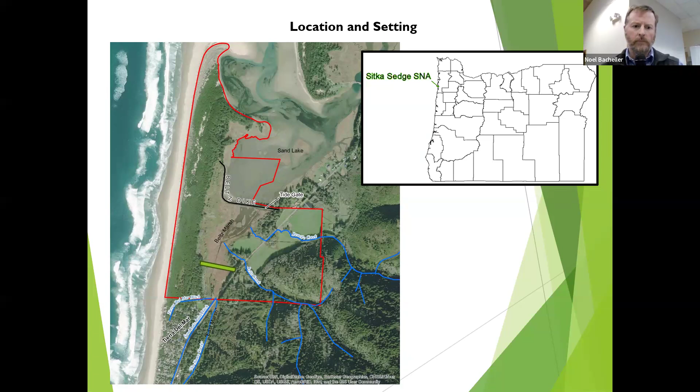This is the existing tide gate in the 1930s vintage dike. The opening of this concrete box culvert is about 4 foot by 4 foot, and it has a vertical hinged tide gate. This tide gate is missing all of its boards, so water rushes through here like crazy. The amount of water that flushes through during a high tide or a receding stormwater event is very fast because of how small this hole is in the dike.

It's like a fire hose. It's causing all kinds of eddies, bubbles, and foam. What you can see in this picture at the bottom is that these eddies, because of the excessive speed of the water, have eaten away at the inside of the dike. The dike used to go all the way out to these wing walls, and it's been eaten away mostly in the last 20 years since the boards on the tide gate flap started to fail.

It is not legal to replace the tide gate flap or the tide gate as is, because fish passage requirements have changed over the years. This is a 1930s or 1950s vintage design. The current standard calls for a much larger opening that allows more water to move more slowly, allowing better fish passage and connectivity and equilibration of water between the sides of the dike. The water blasting through here is really fast, which is considered a fish passage barrier to coho and other fish that can't swim against that high velocity.

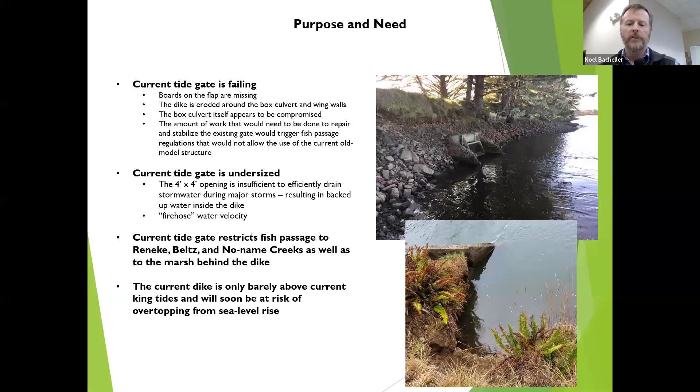So what has been done over the years? A lot of work has been done in the last 11 years on this property in general, and specifically looking at the options for dealing with the failing dike. The property was acquired in 2014, and shortly thereafter a lot of planning started, including assessments of habitat, recreation needs, scenic resources, cultural resources, everything under the sun. We found out early on there was a strong need for hydrological analysis. So in 2016 through 2019, we had two separate highly detailed hydrological studies that characterized how water flows inside and outside of the dike, what the effects would be under different alternatives, and how to weigh those alternatives against each other.

In 2020, we made a decision to look at the setback dike as the preferred alternative. And then 2020 kind of pulled the rug out from under us. We had no funding for a while, and we quickly forged a great relationship with Tillamook Estuaries Partnership to look for other ways of funding the project and continue moving it forward. Tillamook Estuaries Partnership was able to receive grant funding that allowed them to pick up the pieces and start moving forward with the planning. In 2022, we jump-started the whole effort and started moving into design in more detail and with more urgency.

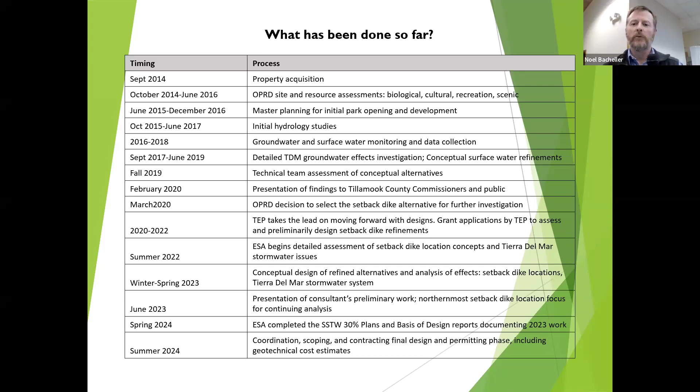Over the last 11 years, there have been at least 24 meetings open to the public and advertised. We've also had news releases and a website that's actively maintained to show the products of all the assessments being done, along with recordings of meetings like this one for people who aren't able to attend in person. We also have an email list sign-up on our webpage for anyone who would like to be notified of upcoming meetings. I encourage anyone here to join that list or look at our website and submit their email. We've also had meetings with adjacent landowners, and we have ongoing collaboration with the Tierra del Mar Community Association and other interested landowners.

Over the years, we have assessed a number of general alternatives, each with sub-flavors. On the upper left, we have the no action or existing condition alternative, which is really the do-nothing approach—what would happen if we did nothing? On the other side of the spectrum, in the upper right, we have dike breach. What was the hydrology like before there was a dike at all, and what would it be like if the dike were breached?

That's another bookend. The two action alternatives that we've really most actively pursued over the last 10 years have been replacing the existing tide gate with a modern muted tidal regulator, a side-hinge type of tide gate that's allowed to stay open for a certain amount of time but has a closure setting, sort of like the toilet float in your toilet that turns the water off when it reaches a certain level.

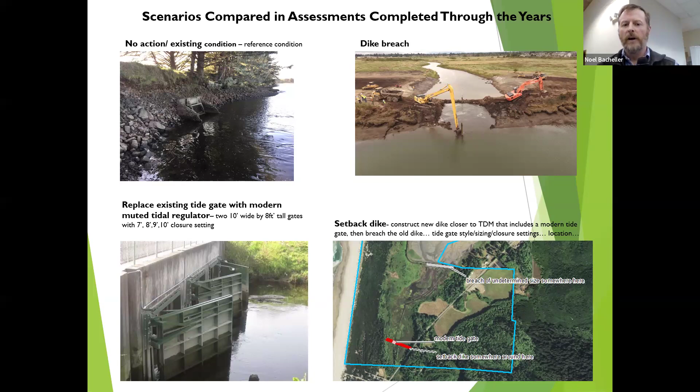This figure doesn't show much beyond the array of different effects expected under different alternatives. This slide is just an example—there are many similar figures representing different features—but this one shows the frequency of surface water presence in the marsh under each alternative.

In the upper left is the existing condition, then the modern tide gate with a 7-foot closure setting, or toilet float closure setting, then the 8-foot, 9-foot, and 10-foot settings. We also have a breach, or pre-dike, hydrology assessment of frequency, and then the setback dike, with the setback represented by this black bar.

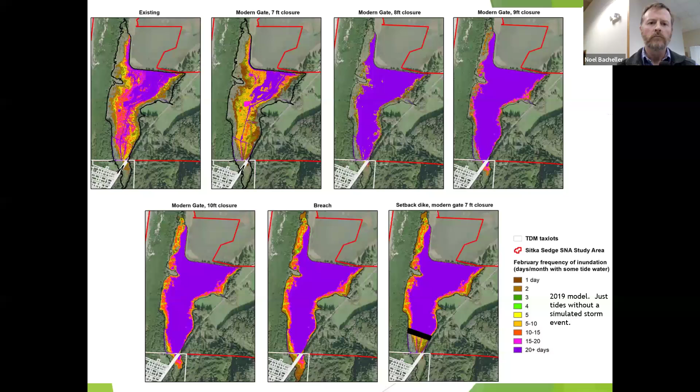This is a video that shows that in a graphical, interactive way. I'm going to pause this for a second so I can explain some of the characteristics before it moves too far, if I can.

The ads are in the way. Well, I'll just talk fast.

In the upper left here we have the existing condition—this is what's out there right now. The next one over is the modern tide gate with an 8-foot closure setting. This is the breach, or pre-dike hydrology, situation. And then the setback dike is represented in the upper right, with the setback dike itself shown as this black bar.

On the bottom, the current moment in time being depicted in the videos at the top is the black bar, and these curves at the bottom are the tide height level present in each of the different situations.

The colors are a little hard to read, at least on my screen, but the green line is the existing condition, the blue line is the outside of the dike, or the breach situation, and these truncated ones, the red and maybe purple, are the modern tide gate and setback dike alternatives.

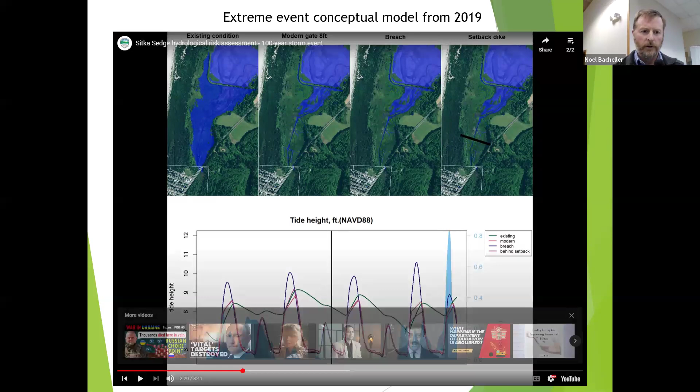Well, let me set the stage. This blue shading here is a 100-year rainfall event, a huge, huge rainfall event. It's coupled also with the highest recorded tides we've seen in our studies, which are about a 12-foot tide, which coincidentally coincides with the actual height of the low point of the dike.

So as this moves forward into the high tide situation—really wish I could move this forward.

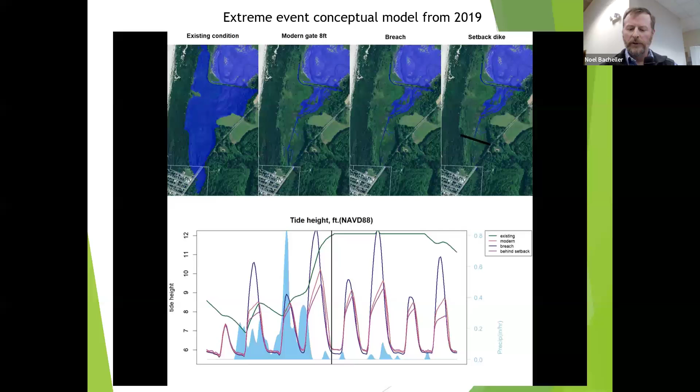So with that, OPRD's sideboards and goals for this project are fivefold. First of all, the design should result in virtually no increase in stormwater, tidewater, or elevated groundwater in private properties in Tierra del Mar. Second, the design should result in meaningful improvements to the estuary and fish habitats in the area inside the dike. Third, the design should restore fish passage to the mouths of Reneke and Beltz Creeks. Recreational access across the marsh should allow visitors to see the marsh up close, reach the beach, and enjoy the diverse coastal environments in between. And the design should route Reneke Creek to the marsh in a natural way, not in a channelized ditch. It's currently in a roadside ditch, and we'll get to that.

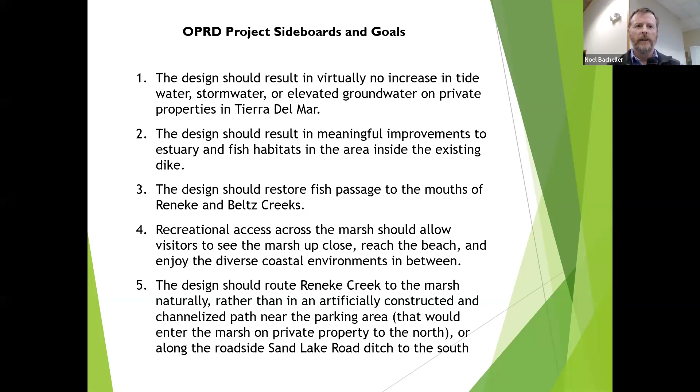So a brief summary of the pros and cons of each of these alternatives. The no action alternative, do nothing. There are no pros to this. The dike is failing. Leaving it alone is not a good idea. The second alternative, dike breach. Well, this would have a very high estuarine benefit for fish and so on, but it does not meet OPRD goals because it would result in more surface water on private property. So that one is out.

The third one, modern tide gates in the existing dike. This one has moderate level of fish benefit, has a moderate level of estuarine restoration benefit, but not as much as the setback dike alternative. The setback dike alternative offers sort of the best approximation of a win-win for both protecting the community and private property and also providing for unfettered fish passage to Beltz Creek, Reneke Creek, and for juvenile fish to move throughout the system in the area north of the setback dike.

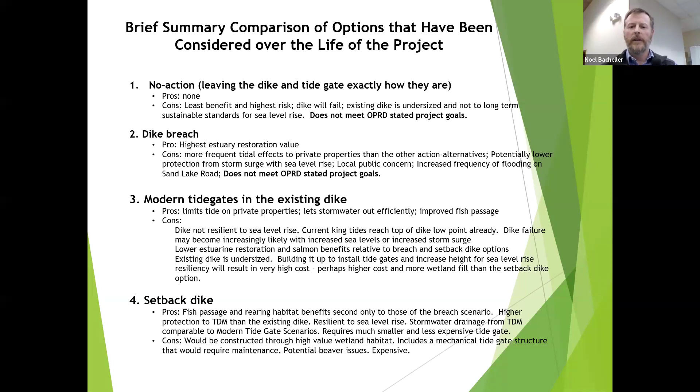In 2020, the state parks leadership, after hearing testimony from the technical team in 2019 — there was a technical team series of meetings, 4 meetings, in which representatives for various resource interests like fish, neighborhood and community infrastructure, engineering, public works were involved. That group really heard testimony and assessed wide-ranging impacts of each of the alternatives to try to provide a good picture of which one of these really makes the most sense.

Shortly thereafter, we met with the Tillamook County Commissioners and with the Oregon State Parks Commission, and then later with the Oregon State Parks executive leadership, and ultimately executive leadership of state parks selected the setback dike as the alternative to pursue moving forward. This decision was made in the spring of 2020, and shortly thereafter, we received a letter of support to aid in getting grants from the Tierra del Mar Community Association and started to try to move this forward through design.

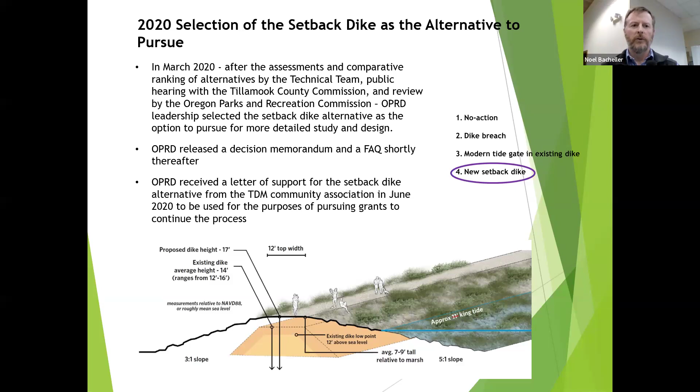And of course, COVID hit, funding fell apart, and we lost some momentum. Fortunately, Tillamook Estuaries Partnership was able to come to the rescue and really pick up this project and move it forward.

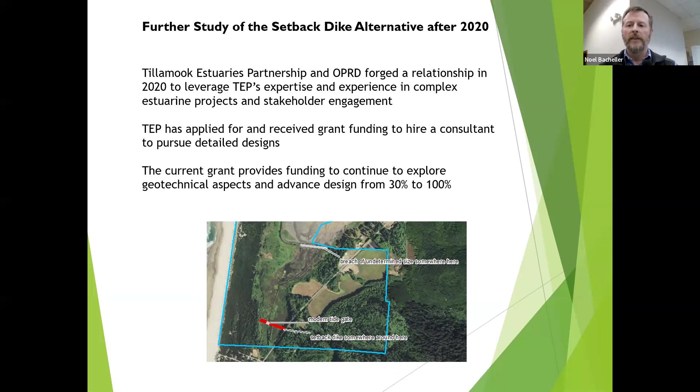So after 2020, after Tillamook Estuaries Partnership came into the program, they were able to get a grant and hire a consultant, Environmental Science Associates, and you'll hear from Hunter here soon on the different elements of design that could be incorporated into this project.

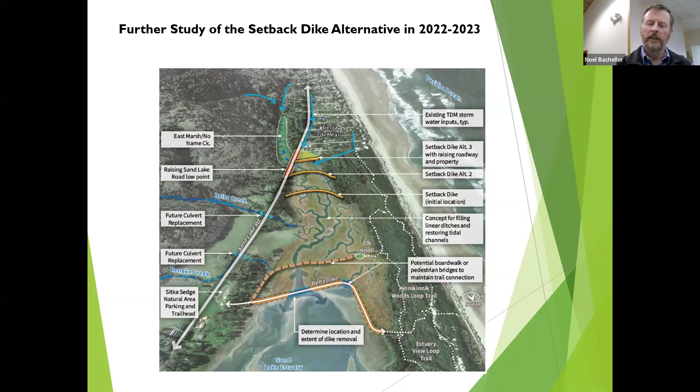And just to get to those in a real basic sense, this slide here is looking south towards Tierra del Mar from Sand Lake, and it shows an array of potential setback dike locations. It was necessary to assess a bunch of different options to figure out which one worked best. You don't know off the top of your head which one's going to work until you model it and try it. So there were an array of different options here that were assessed, ultimately ending up with a selection that you'll see in a coming slide.

Also, as part of that, Environmental Science Associates and Tillamook Estuaries Partnership did an assessment of surface water and groundwater issues in the community of Tierra del Mar. This is outside of OPRD's scope, but it may be of interest to members of the community.

So this is the process I was referring to earlier of trying to figure out exactly where the setback dike should go. I've been calling this tapping on the wall to find the stud. Is this the right spot? Not here. Is this the right spot? No. You keep going until you find one that actually meets your project goals.

In our case, the project goals we're looking for are minimizing the size of the setback dike, its footprint on the land, as well as maximizing or having a sufficient basin size behind it for stormwater storage when the dike has to be closed. There would be a muted tidal regulator in the setback dike that closes during high tide. During that time, stormwater from a big rainfall event would pool up behind the dike. If the setback dike is too close to Tierra del Mar, water levels will rise. But if it's far enough north, there's enough basin size that water levels won't rise significantly, and you'll have enough room to hold all that stormwater during the hours the muted tidal regulator is closed.

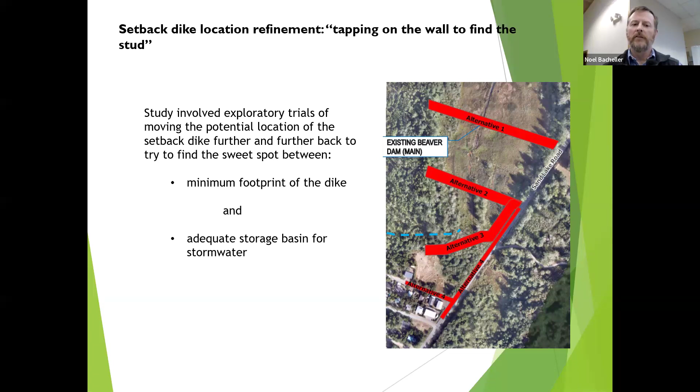So alternative one, the furthest north option, very close to the original location assessed in 2019 and 2020, is the only one that meets the goals. It has more than enough basin size to store stormwater, and it's as far south as you can go to minimize that footprint size. It also allows unfettered fish passage access to Beltz and Reneke creeks, and maximizes the amount of estuarine restoration that can happen north of the setback dike.

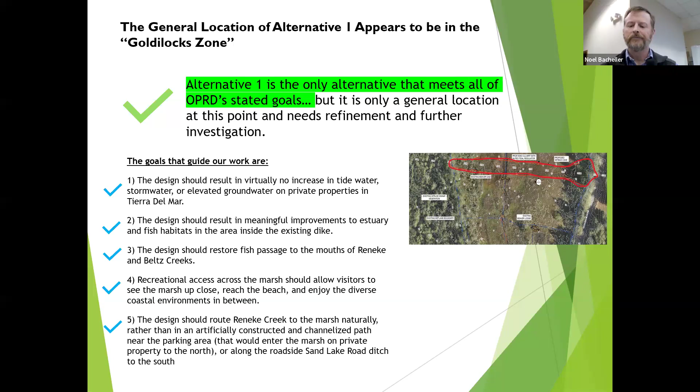So the effects on habitat are manyfold. The setback dike itself is about a 1.5 acre footprint structure in the alternative one location—about as small as we could get it using this approach of finding the sweet spot between sufficient storage basin and moving it south. The project would restore about 70 acres of natural estuarine conditions north of the setback dike, to the ecology present there prior to the 1930s when the Beltz dike was constructed. About 78% of the habitat behind the historic Beltz dike would be restored, and 85% of the marsh within the state park boundaries would be restored to natural estuary.

Higher tides along the north of the setback dike would also provide fish and aquatic wildlife foraging and rearing habitat. It's not all about fish passage—it's also about the habitat itself north of the setback dike. That low salt marsh and marsh habitat is really essential for juvenile fish. Lastly, there is some thinking that natural estuaries are more resilient to sea level rise. The sediment that comes in with incoming tides gets deposited in layers over time, allowing the marsh to grow upward as sea levels increase.

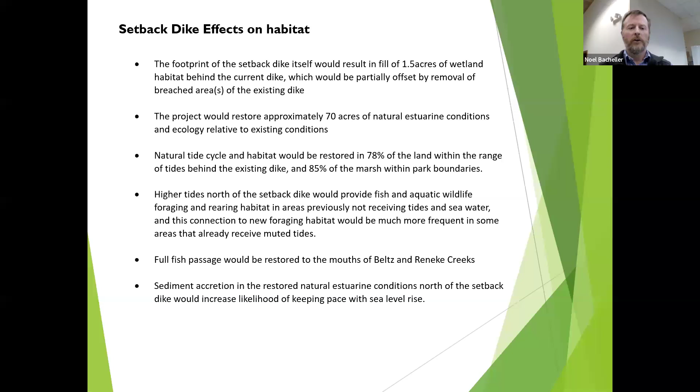When the dike and tide gate were fully functional, from the 1930s up until the 1990s, this area didn't get much tidewater, so it was able to transition during that time to a freshwater system instead of a saltwater system. Now, with the breach of the exterior dike, it would return to more of a saltwater habitat.

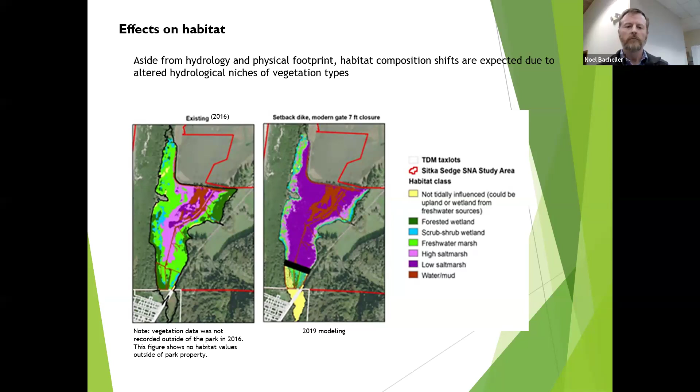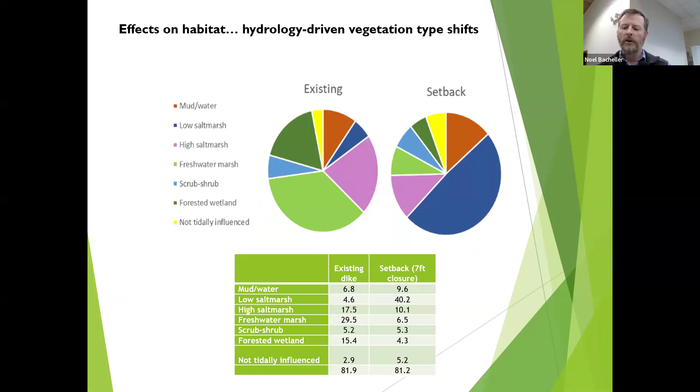Another way of viewing that, you can see the winners and losers on these different habitat types. Low salt marsh is a big winner under the setback dike condition, and the freshwater marsh decreases because there's more salt water there as a result of the breach in the exterior dike.

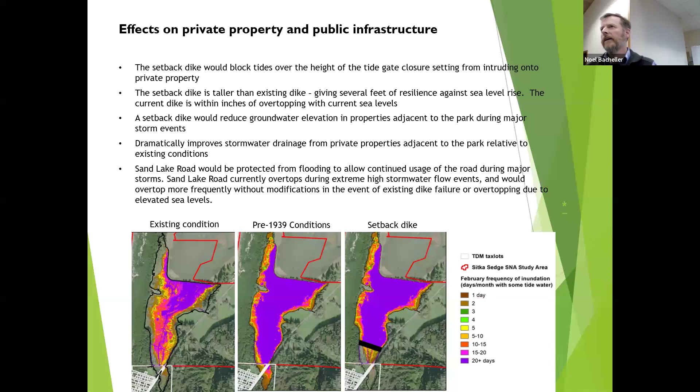In terms of effects to private property, the take-home here is the setback dike alternative decreases the amount of surface water that would reach private properties on the north end of Tierra del Mar significantly, compared to the pre-1939 dike construction and also relative to existing conditions. This is because of that hourglass effect. So in some ways, the construction of the setback dike and breaching the exterior dike is self-mitigating, in that the green areas here would be estuary gain.

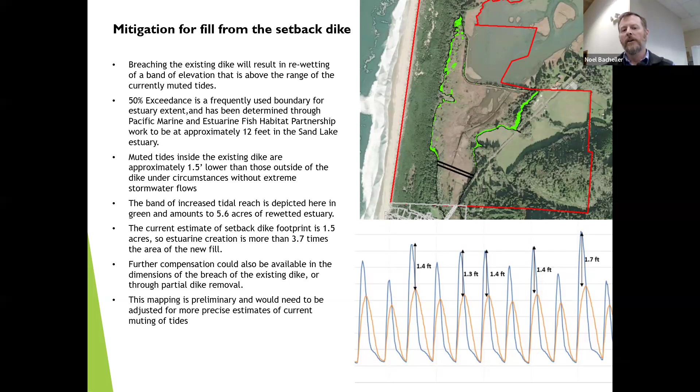If you look at these hydrographs at the bottom, these curves are showing the height of the tide. The blue is outside of the dike, and the orange is inside of the dike under current conditions. The tide doesn't reach as high under existing conditions, but under a scenario with a breach here and a setback dike here, these green areas would be re-wetted by allowing more water to get in. That compensates for the loss of 1.5 acres of habitat that would be lost from placement of the setback dike here.

So, next steps. Geotechnical boring is key to figuring out how and where to construct, and the details of the engineering for the project. That's something we've been trying to get in place for quite a while now. We need to take the designs from 30% all the way to the finish line.

We need to find out more about permittability. There are a lot of regulations around this kind of thing, as you can imagine. And there are a lot of things that need to be figured out about how and when to apply for the various permits, and what the hurdles would be to move through that permitting process.

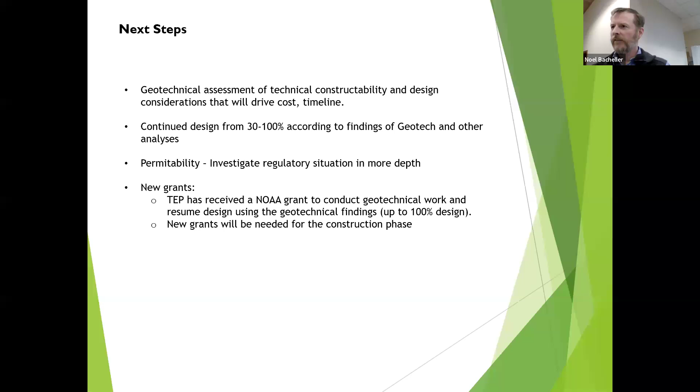And we need new grants. We currently have grant funding to get us to 100% design. We don't have any money yet for implementation, so we'll be applying for funds to take this through to actual construction, should we get to a stage where we're permitted, the designs look good, and all of that.

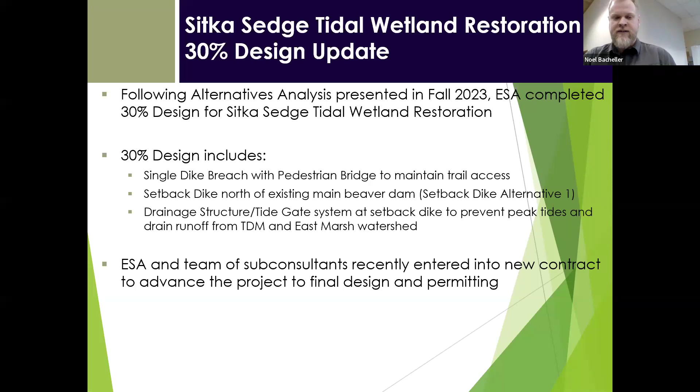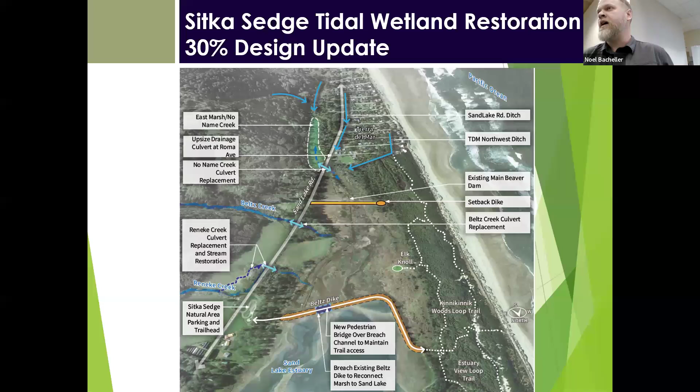This is another view of kind of the same thing. This is starting to get into our construction drawings that we're developing - this is from the 30% plans. Again, at the north end, showing the dike breach and a pedestrian bridge, and the setback dike across the south end of the marsh. Those are really the two main elements of the project at this point. I'll get into some of the other pieces of the project that are being combined in as we move the entire project forward through permitting and final design.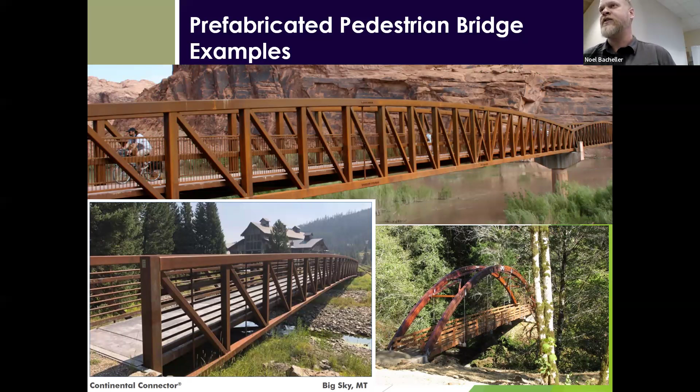We're considering prefabricated bridge options as the most economical approach to a bridge of this size. We've got some upcoming meetings to work with state parks about the aesthetics, the material choices, and really what do we want this bridge to look like. We're also working on other engineering aspects to figure out how big it can be, what are the cost trade-offs for the different sizes of bridge options, and what sort of foundation is required - the abutments the bridge will sit on, most likely deep piles that will extend up to 80 feet below ground to tie into solid foundation.

So we're still refining exactly the size of this breach. This is a look at some analysis we did in the last phase of work, comparing a 100-foot dike breach versus a 200-foot dike breach. In the earlier stage of the project, in 2019, we were describing a 40-foot breach, which was actually a 40-foot bottom width of the channel. When you carry side slopes up to where it would intersect with the top of the dike, that would have been about an 80-foot wide breach at the top. So what we're looking at here is essentially a 100-foot breach, just a little bit bigger than that original concept, shown here on the left, and a 200-foot wide breach shown on the right.

This is a moment within the model where water is rushing in under a king tide event - one of the most extreme moments of water rushing in through this new breach. What we see here on the left is a view from our HECRAS model, where you can see the water coming in and really circling around, eddying around. That's similar to the effect we see with the existing culvert that's there, which can have a tendency to cause erosion. So that's one reason why we're looking to increase the size of that breach until we start to see that erosive effect go away.

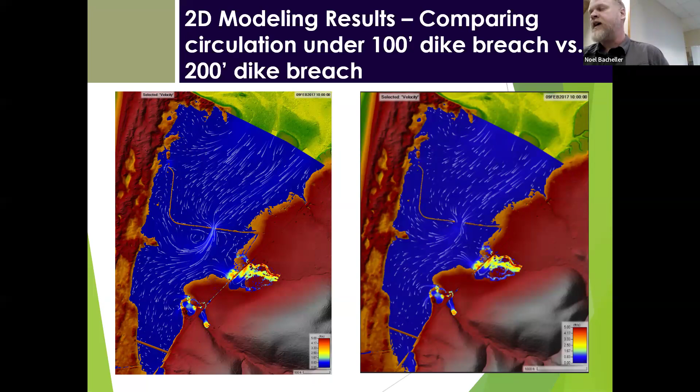And on the right there with the 200-foot breach, that eddy feature, that swirling of water is dissipated. The velocities would be lower with a larger breach, which would also lead to less potential for erosion and less need to armor the banks beneath that bridge.

Another consideration is, we don't want to make this breach and bridge too small. This is our one shot to do it right, and so we really don't want to undershoot it.

This is an example that we are looking at as a reference, Nisqually Wildlife Refuge near Tacoma, Olympia area. You can see here this is progression through time. From 2011, they did a similar project where they reconnected this tidal marsh, breached the channel, or created a breach channel, and put in a 40-foot span pedestrian bridge over that channel. About 8 years later in 2019, that channel was trying to enlarge itself just from all that water rushing in and out. You can see in the image there were some attempts to stabilize that bank and save the bridge that they'd put in.

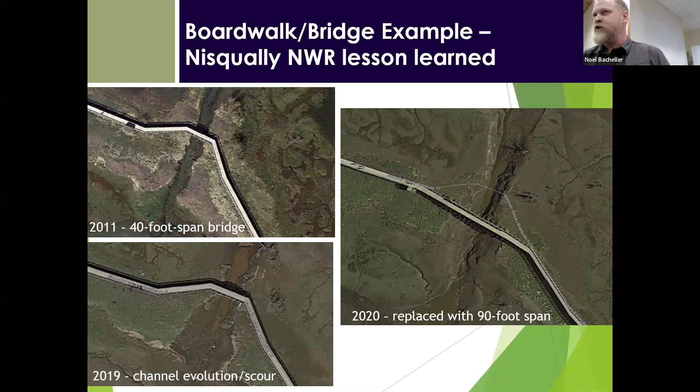But they eventually realized that was a losing battle, and that small bridge foundation was being undermined. Here in 2020, they ended up replacing that bridge only 9 years after they originally built it, and went from a 40-foot span up to a 90-foot span. So again, really taking this as a lesson learned that we don't want to undershoot the size of this bridge and dike breach.

Another example that's closer to home here is the Whalen Island Bridge. This bridge was replaced with a much larger structure. The bridge that got put in here is about an 80-foot span. And what you can see here, though, is that the banks around these bridge foundations and the entire channel beneath it is heavily armored with riprap.

That's because the size of the bridge that was selected there does allow full connectivity and equalizing of the water levels on either side. But when the water is moving through that opening at peak drain out moments, the velocities are very high. This riprap is necessary to protect the bridge from erosion. So again, just another example of not wanting to undersize our bridge at Sitka Sedge.

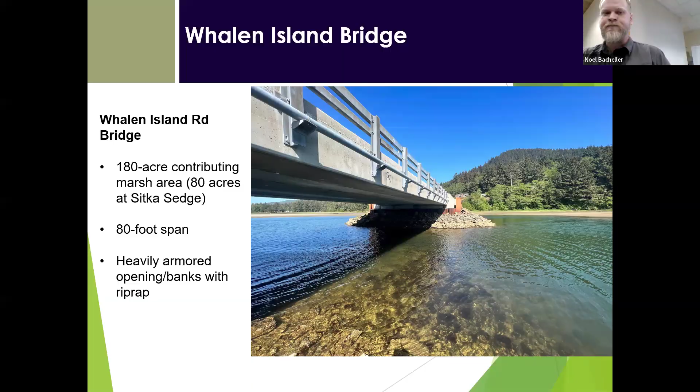Next, zooming in a bit on the setback dike itself. Again, this is kind of a colorized or cartoonized version of our construction drawings. A plan view on the top end there. Again, like I said, we're connecting to Sand Lake Road on the east side. On the west side, we're tying into that forested dune. This would have a gravel access road on top of it to allow for access, monitoring, and maintenance of the tide gate structure that would be located right in the center at the existing channel.

One key feature here that really played into our thinking about where to propose locating the setback dike is the existing beaver dam. There is a prominent beaver dam out there that's been persistent. As Noel was showing, some other options where we push that setback dike further south are really in an area that's impounded by these beaver dams. So one of our ideas here is locating the setback dike not only in an area that has enough storage to contain all of the stormwater from Tierra del Mar, but also in a manner that will keep the setback dike north of that beaver dam and essentially let that southern 10 acres stay as they are, maintaining that freshwater marsh and beaver pond complex.

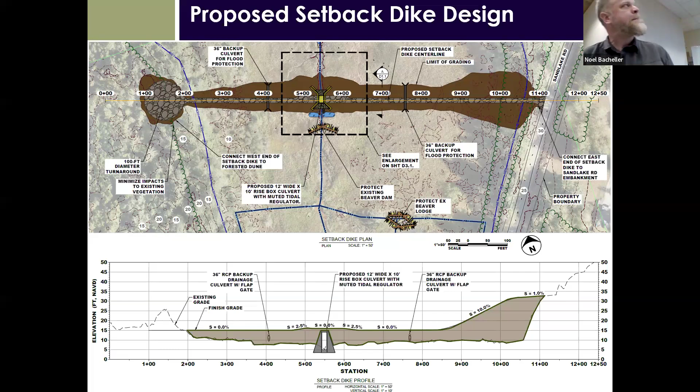This is a cross section of the setback dike, describing a couple things I was just mentioning. The black line shows a 15-foot top elevation, which is what we'd expect no lower than long-term in the future. But to achieve that, we would build the dike at least a couple feet higher to accommodate that settlement over the long term.

We're showing 5-to-1 pretty flat side slopes, and for comparison, the existing dike out there has locations that are 1-to-1, one foot horizontal to one foot vertical, or 100% slope. So we're showing much flatter side slopes here.

Where this new earth embankment crosses the marsh, there will be a need to stabilize the subgrade, the soil beneath it, and prepare it in a way that will counteract some of that settlement. Again, we do expect settlement to occur, and we'll overbuild the dike to accommodate that.

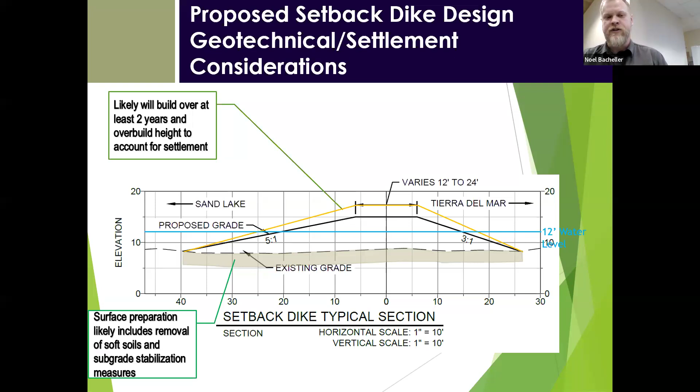The blue line across this image is the 12-foot water level, the current peak tide observed in Sand Lake. On the outboard side, the connected side toward Sand Lake, that 12-foot water level only goes about halfway up the dike embankment. Again, we have a lot of extra capacity there, what we refer to as freeboard, to accommodate high water and prepare the dike for long-term future sea level rise and potential storm surges.

Zooming in on the tide gate structure itself, right in the middle of the setback dike, there's the main channel within Belts Marsh. We're proposing a 12-foot wide concrete box culvert structure with head walls and wing walls on both sides. You can see its location relative to the main beaver dam, an existing beaver dam that's out there now, which is another consideration for us, thinking about making sure this structure stays functional.

We will likely need to exclude beaver from this immediate location, likely with some sort of exclusion fencing or other methods. We're working with ODFW right now to make sure we're meeting fish passage criteria while also being able to keep beavers out of this structure and tide gate so they don't block it.

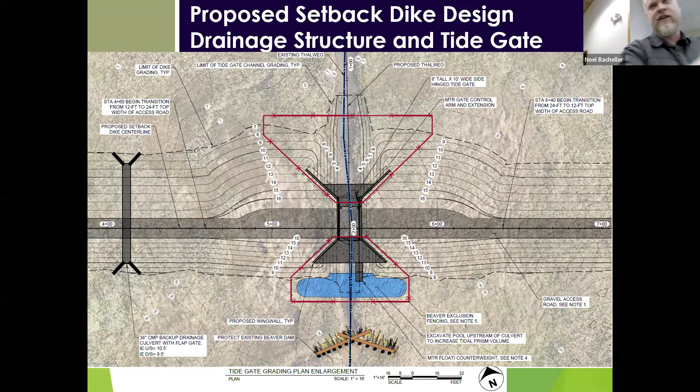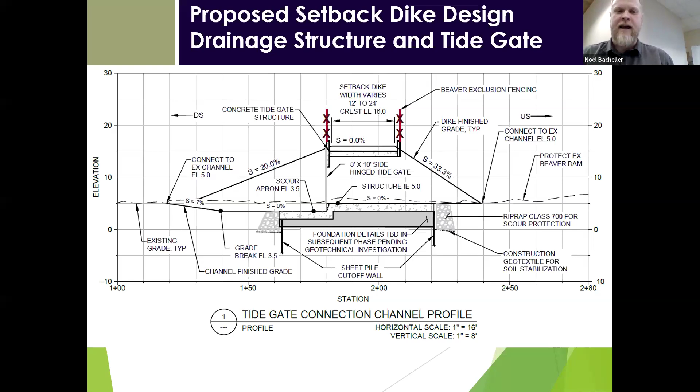As Noel mentioned, geotechnical engineering is a big aspect not only of the setback dike, but the tide gate structure as well. This is scheduled for late March and early April. We'll have a geotechnical investigation collecting deep borings both on Sand Lake Road and on the existing dike to look at the soil and the layers of soils and sediments beneath the ground.

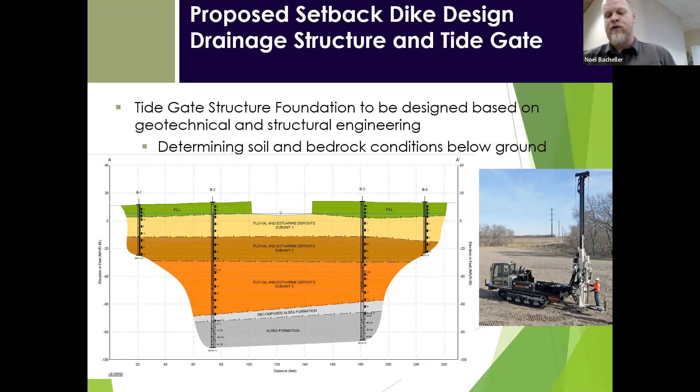We expect that for the pedestrian bridge, for Reneke Creek Bridge, well, I'll talk about here in a second as well.

As I mentioned, beaver and their heavy activity and presence right near this proposed tide gate structure is a big consideration for us. Beaver are there right now, and they will likely remain at Sitka Sedge after the reconnection.

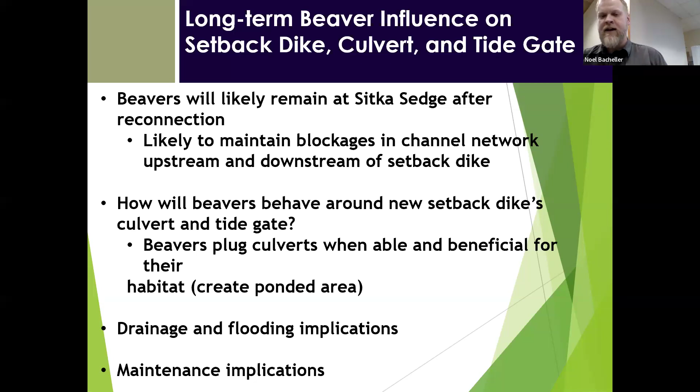Beavers are often more thought of as being in freshwater environments, but there is a lot of growing research finding beavers in these estuary areas and in brackish water conditions. Beavers do plug culverts, as I'm sure a lot of you know, and can cause a lot of problems especially when culverts are too small and easy to block. That has big implications on drainage function and flooding of areas upstream of those blocked culverts. Not only that, but implications on the maintenance required on this structure long into the future—at least annual or monthly inspections, with somebody going out and likely removing debris.

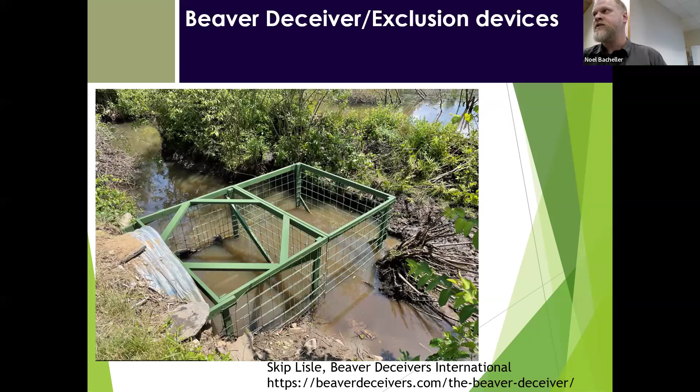In addition to the big pieces of infrastructure, we're also looking at other ways to enhance habitat conditions within the marsh.

Often when we approach these projects we see ditch networks that have been excavated through these wetlands, and a lot of the original tidal channels have been filled and the areas used as pasture. Typically we look at filling those drainage ditches and re-excavating new sinuous tidal channels. We are considering that here, but as Noel showed in the vegetation map, the vegetation out in the marsh is really high quality. While there will be some changes in plant communities with the reconnection of more salt water, getting out there to fill these ditches, dig new channels, or put in wood habitat structures would have an impact on the marsh. So we're trying to weigh and balance that right now—how much do we want to get into that wet area and do these activities, and is it worth the impact it will cause?

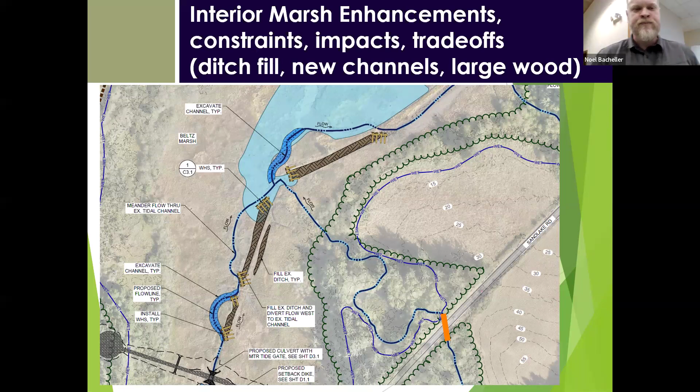Including within our design, we're upsizing the drainage culvert at Roma Ave on the Sand Lake Road ditch. This is the one culvert within Tierra del Mar that is within the zone of influence of tides and elevated water levels that can back up from the marsh. With the setback dike, we will be reducing those water levels, so we won't see these same high water levels. But the Roma Ave culvert is the one structure within this zone of influence, and it's kind of low-hanging fruit to replace this culvert, upsize it, and improve the drainage of that ditch.

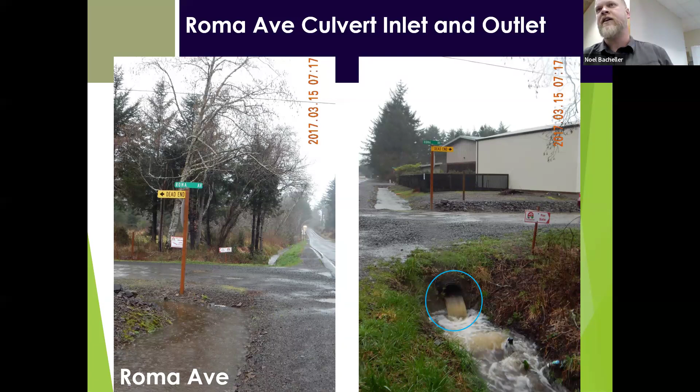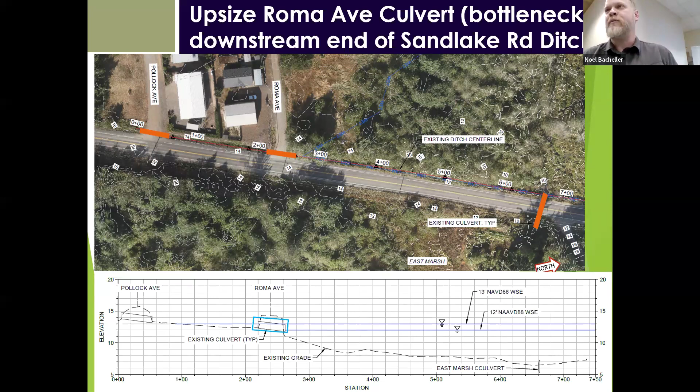There's nothing in this about removing the old structure. Is the intention to remove the old dike? The whole dike, or?

I guess the question was, within this estimate and list of activities I just talked through, I didn't mention the old culvert that's there now and the rest of the dike. Most of that existing dike will stay in place. We'll just create a gap or breach that will put the pedestrian bridge over. The existing culvert, which is failing and has erosion around it, will be removed. That concrete structure will be taken out and the embankment rebuilt, since the trail goes over that section now. When we take that structure out, we'll need to rebuild the embankment in that area to make sure it's stable for the long term for the trail.

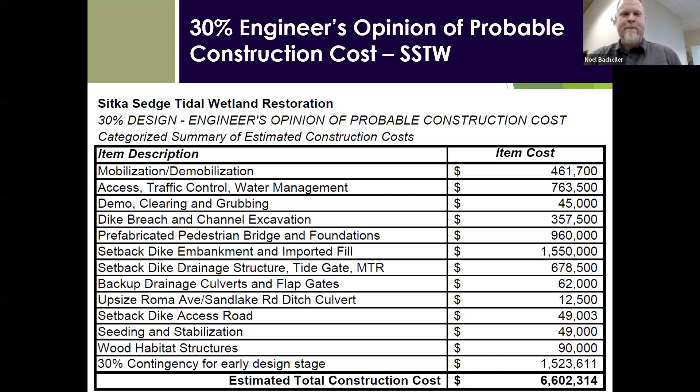Another aspect of this area, not necessarily the park itself—the Sitka Sedge Tidal Wetland Project has been fully located within the park—we've also been working with Tillamook County Public Works, and Chris Lady is here in case questions come up on this aspect, to replace the culvert crossings on Sand Lake Road. There are the three creeks Noel mentioned: Reneke Creek, the largest one with the highest fish use or fish potential, in the north; Beltz Creek in the center of the project area; and No Name Creek coming in from the south near Tierra del Mar.

We worked under a separate contract directly with Tillamook County Public Works to take the Reneke Creek culvert replacement to a 30% level of design. Again, I mentioned our sub-consultants—we also worked with David Evans and Associates, roadway and bridge engineers, on that phase of the project.

Now, as this project is moving forward to final design, we've combined it all together for efficiency, to include everything in a single plan set, a single package of documentation, and try to permit it all together to the extent that makes sense. There may be, as we work through the permitting process, other reasons or funding availability that allow Reneke Creek to be built first. But at this point, we've combined it all together because these creeks and the wetland and all of the hydrology are so related that we wanted to analyze the whole system together.

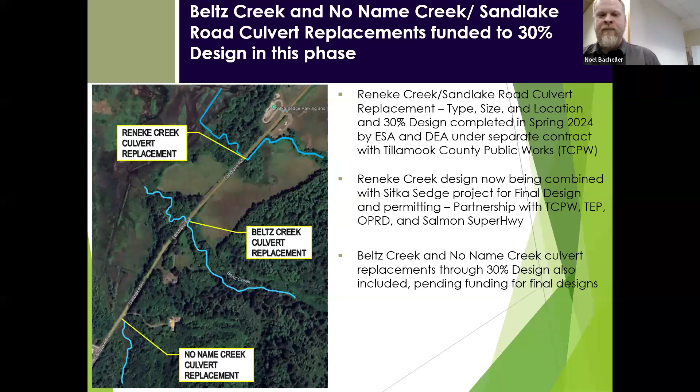Here's a couple photos of Reneke Creek itself at the crossing. I'll talk mostly about Reneke Creek. As I said, we worked under a separate contract to get Reneke to 30% design. We are starting now to work on Beltz Creek and No Name Creek culvert replacements, but now I'll talk specifically about Reneke Creek.

Reneke Creek flows from a forested hillside to the east down towards Sand Lake Road. Where it hits Sand Lake Road, there is a culvert, but that culvert has been blocked, filled with gravels. Reneke Creek carries large amounts of gravel from the steeper stream section and deposits that gravel into the creek channel, in this case completely burying the culvert that used to convey much of the creek across Sand Lake Road.

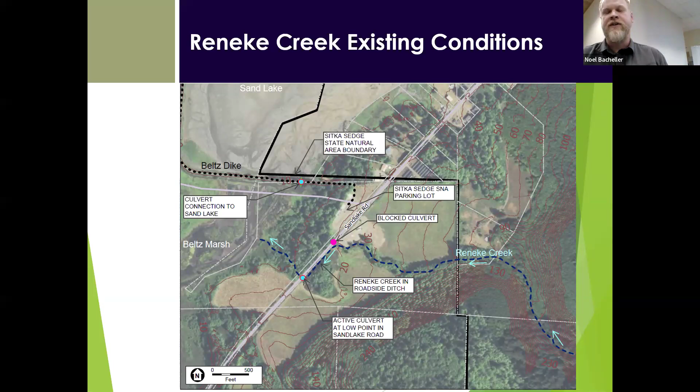Right now, the creek actually flows down the roadside ditch and comes down to the low point in the landscape and in Sand Lake Road. If you drive through this area, there's a pretty obvious dip location, and that area overtops. The culvert there is only 24 inches in diameter, so it frequently overtops and doesn't have the capacity to convey all that water. Water will overtop the roadway, and that is a driver for not only the infrastructure aspect of the project, but for fish passage as well — that very small pipe doesn't really allow fish movement into the upper portion of Reneke Creek.

So stepping back, we really wanted to see where it makes sense to replace the culvert, where we want to put a new bridge, a new crossing structure. And so we looked back through time.

The blue dashed line is an old channel of Reneke Creek that was excavated along with the construction of the dike. Reneke Creek was channelized and routed around the east end of the dike, flowing through a culvert there to get out to Sand Lake. Not only has the culvert filled in, but that channel has also filled in over time because of these gravel deposits coming downstream.

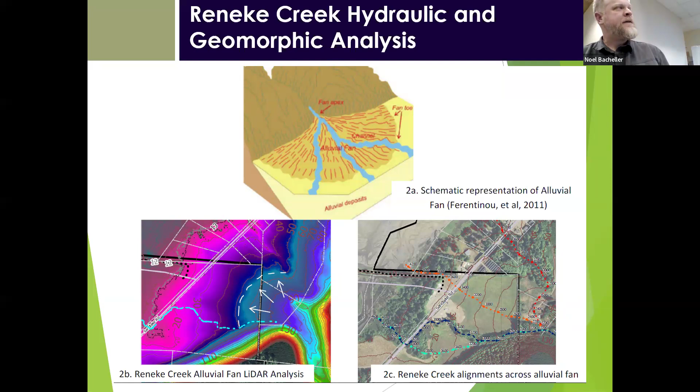As I was showing in this image, through the progression of development and clearing, Reneke Creek has further been boxed into this location.

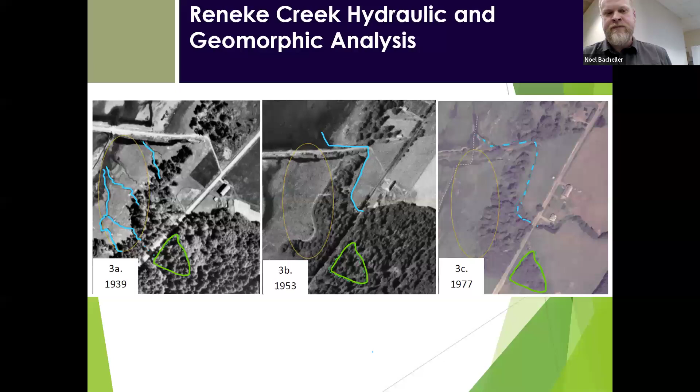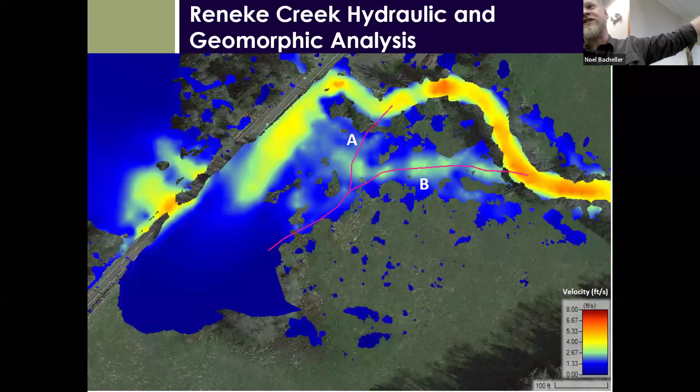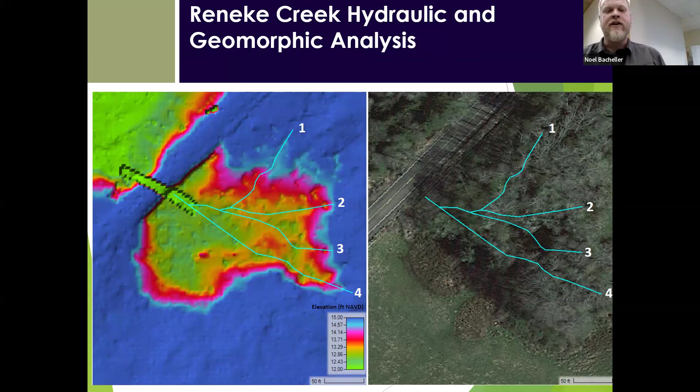In addition, within that forested wetland triangle, we see existing flow paths, or old channels that Reneke Creek used to flow through, and in fact still does. When high flows overtop the banks of the channel, a lot of this water still ends up flowing into these flow paths that are still there today. These are some photos in that forested wetland, showing traces of the old creek channel that still carry water today.

Our concept for restoring Reneke Creek and replacing the culvert that's there is a combination of elements. We're trying to get that creek out of that roadside ditch and allow it to flow across this area that used to be forested, diverting the creek away from the road, flowing across this area, and revegetating it to try to recreate the conditions that were historically there.

With that alluvial fan type of feature, creeks aren't usually just in a single channel. They are usually spread out into multiple side channels, and that's something we're also going to try to recreate.

Along with that, the big element for improving access and transportation along Sand Lake Road is putting in a new bridge where that small culvert is now. This also shows we would raise Sand Lake Road up by a couple of feet to reduce that low point, the potential for overtopping, and to have a more resilient road in this location.

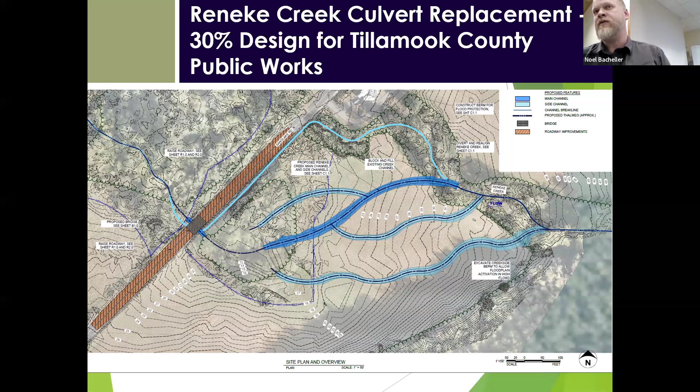A little look at the engineering drawings: this is the roadway design at 30%, showing a raising up of that road. And this is a look at the bridge itself, replacing that small culvert with a 49-foot span bridge. Quite an upsizing, not only to provide great fish passage, but also to pass gravels and wood debris and prevent blockage, as well as giving that freeboard, the extra vertical space to adapt to future water levels, high flows, and debris passage.

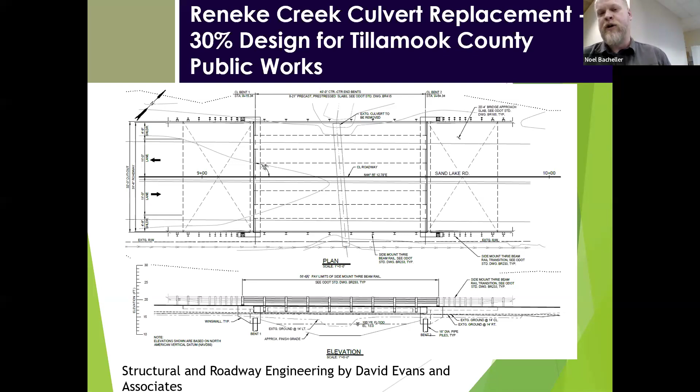This being a separate project, all of that work I just described, the raising of the road, the new bridge, and the stream restoration work, we're estimating at about $3 million. The county has applied for Federal Highways Administration grant funding in partnership with Trout Unlimited, Tillamook Estuaries Partnership, and the Salmon Superhighway Partnership.

That's the end of the content. As I said, we've continued to work on the project since November when this presentation took place, and we are now starting designs on Beltz Creek and No Name Creek culvert replacements, as well as engaging with the permitting agencies, advancing this project toward 60% design and preparing to submit permit applications.

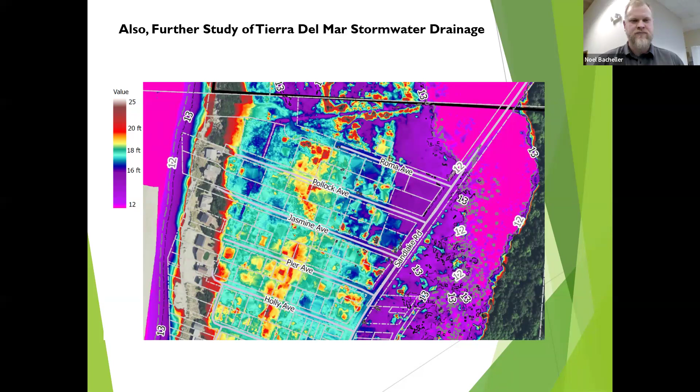Yeah, I can answer that. Right now its distribution is patchy out there in the marsh, and you have to go out there pretty much in rubber boots to find it, so it's not easily accessible. But what we would expect under the changed hydrology from the project is that it would be pushed to a new location with similar hydrology. All of these plants occur in what I'll call bathtub rings at a certain elevation zone in the park. So what is now a Sitka sedge niche habitat will shift upwards as the tides shift upwards, which will also make it more accessible from the edges. You should be able to find it more easily without having to trudge through the marsh in hip boots.

Being a longtime salmon fisherman, I've always been interested in the decline of salmon in the Northwest. This is a typical case where we took a couple of streams that were very productive for coho salmon before my time and turned them into ditches. Has there been any thought of whether we'll ever get coho salmon going back up Reneke and the other creeks we're talking about restoring here?

Yeah, absolutely. That's really a big driver for this project: fish passage, fish access into these habitats. The dike breach—starting with the existing culvert that's there now, especially when it had a tide gate on it—almost fully blocked salmon, coho, from entering the marsh and accessing the creeks. So the first step along that pathway is relieving that constriction, removing the existing culvert and replacing it with a large breach. That will allow fish access from Sand Lake into the marsh as a whole. And then, as I was just describing, the plans for Reneke Creek itself, which has the highest potential for fish use and where we do see some adult salmon making it to now.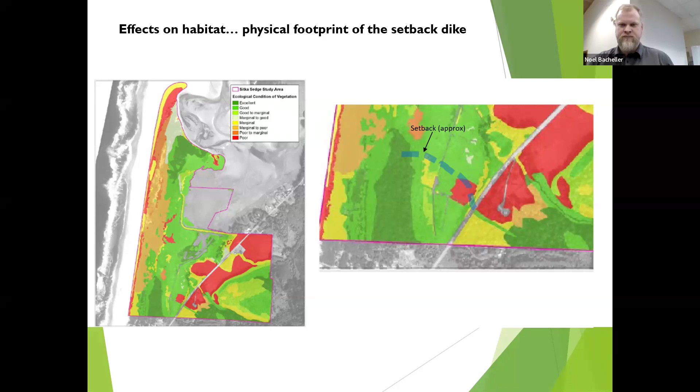I think this is a multi-part question. The county is seeking concurrent funding from federal highways for Reneke Creek. Reneke Creek, as you all drive it, is where it overtops the road—every single year it just continues to eat up the side of the road. Belts Creek is further up.

Thank you, well that makes it easier. We are going concurrent to this. We've applied for a federal highway aquatic organism passage grant for that. I've asked to try to separate the environmental out, so the NEPA process—National Environmental Policy Act—which would go through the cultural review and everything else. There's a point where we went concurrent with the dike, which makes sense, but we also want to continue to push really hard because I can replace that bridge, which is why we funded the 30% design, so that we have enough information to apply for grant funding. Hopefully, knock on wood, we'll get grant funding for that. So if we can build that before the dike, absolutely, we're going to build it before the dike.

And just to add to that, I mentioned combining these projects, and that was really so our team can work on this all together and also to utilize some of TEP's grant funding that they've obtained to continue advancing Reneke Creek. But as Chris was just saying, there may become a point where we can get Reneke Creek done faster, obtain construction funding quicker, and we may break that off to complete it separately.

Any other questions?

I'm wondering again about funding. Is NOAA your primary source of funding, and how do you see it going forward, given that NOAA seems to be at risk of being shut down? Where are your grants coming from—are they all coming from NOAA or elsewhere?